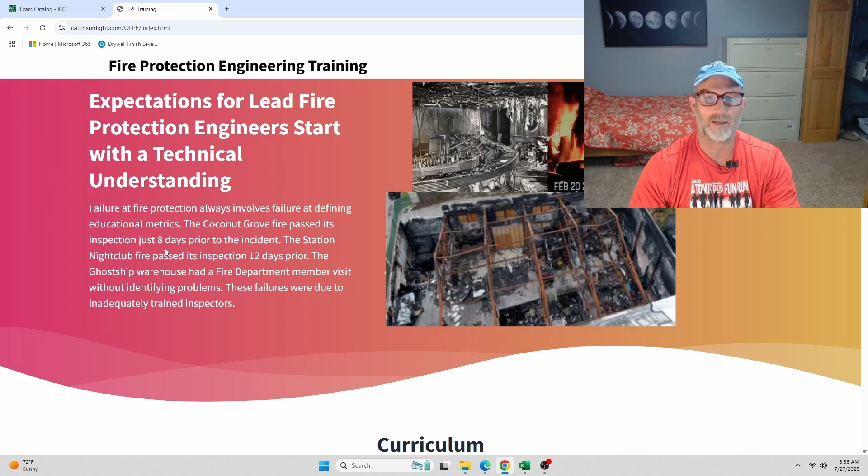So take a look at this. I've been through this a couple times. I set up this website a while ago for people in fire protection engineering related fields. When you're a professional engineer, a lot of times you take those PE exams, there's not a single code reference, but if you're typically an engineer, you need to know the codes. And failure on the part of engineers, or anybody really, to know the codes in inspector positions or design positions results in serious problems.

So I put this together a few years ago to do that. I have 500 questions for the building official test. I'm calling it building official, but it's certified building official, BC test, ICC BC. I have it right there. How this works, they're all 10 question tests, so I have 50 of them. And at the top, you'll see it's certified building official, code quiz 1, 2025, ICC IPC.

And how this works is all you have to do is hover over what says hint, it'll give you the reference. So it's different than the ones I've done more recently. I've cut some corners on the ones I've done more recently, I didn't want to take the time to put it together. This one, I took quite a bit of time to do.

So let's just look at question 1. This is from the IPC, you're going to see the same thing in the IBC, it has the same plumbing table there. How many water closets are required for a church with 150 men and 150 women? I think, man, I don't know, 3 for men, 3 for women? What would it be? Sometimes it's different for men and women. I'd say B. I come down here, hit submit.

And what did I get here? Does it give me the number? Yeah, see, it's 1 out of 10. That's how it's set up here. Your score is 1 out of 10.

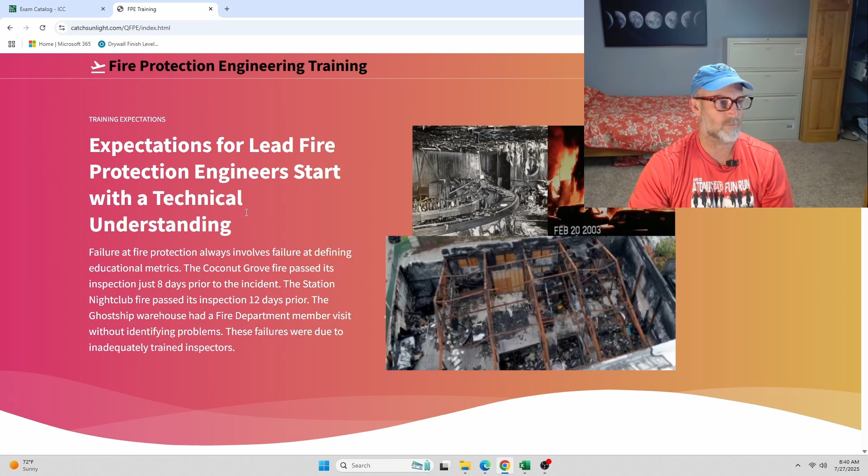Okay, let's just go back to the previous page. You can grab one anywhere, let's just grab one here. So see how it says IBC now? It said IPC before, this is IBC. You can, it's just going to go through.

This one says IRC. So at the top, it's going to tell you what the code book is, and the hint is going to give you the specific. So go to section G2406.2 of the IRC 2015 edition.

Here's the problem. Between the 2015 and 2021 or 2024, some of the reference numbers have changed. The substance hasn't changed, but the reference numbers have. So you could actually go to ICC Safe and look at the 2015 version to look up the code, or you can just find it in the 2021 or 2024 editions. I'm not going to take the time to map 2015 to 2024, it would just take too long. So that's how this works.

The objective here is, as with my other quizzes that I've developed, I want you to see this. You need to go through this with a specific periodicity. And I write it out here. You need to actually highlight.

So this is the 2015 IMC. I'll go through the 2015 IMC with you just as an example. I'm not going to go through all these code books, it'll just take too long. And I've been through some of these code books in past videos. Just look at some of my other videos for highlights.

It'll satisfy that need. But you can see how I highlighted here and underlined a certain section. And that corresponds, the underline corresponds with the answer. The highlight just generally corresponds with the reference.

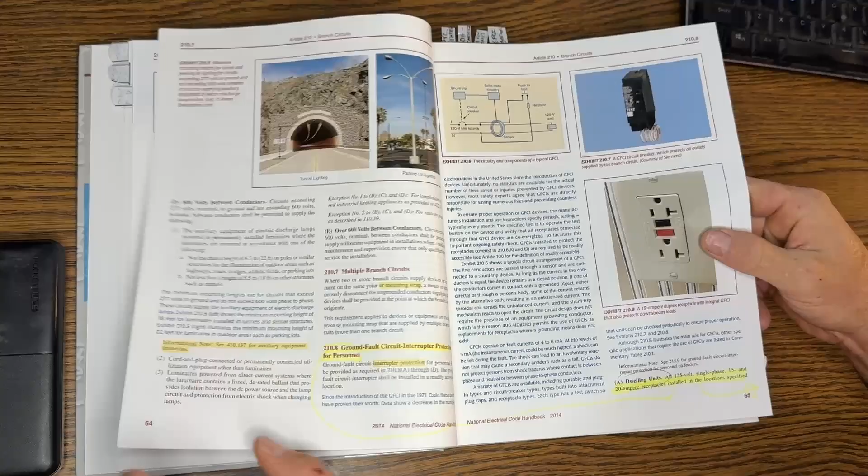GFCIs - dwelling units, bathrooms, garages. That's what they're asking. Just look at my highlights - where do you need GFCI protection? Bathrooms, garages, and then I came over here - kitchens, there they are. So there's your 3 there for GFCIs.

Countertops, wall countertop spaces - you have to be able to access within 24 inches. So the question was, anytime you're dealing with a kitchen, you got to access a receptacle within 24 inches on any countertop more than 12 inches wide. Islands - 24 inches and 12 inches there again, same thing. Just read that, take a look at it. I'm not going to take the time to read everything here.

Lighting outlets required - let's see. Vehicle door in garage shall not be considered as an outdoor entrance, blah blah blah blah. Just read the highlights - highlight what I did in yellow. Keep in mind, that is not yellow - I'm looking at the ones that I highlighted.

Okay, let's see here, over here - lighting load, 3 watts per square foot. That's what it comes down to - square meter. So what they ask is, when you're sizing lighting, it's 3 watts per square foot for dwelling units. This is just a table for sizing. I can't remember the nature of the question, but the questions I showed you before in that online test come right from these references that I've highlighted.

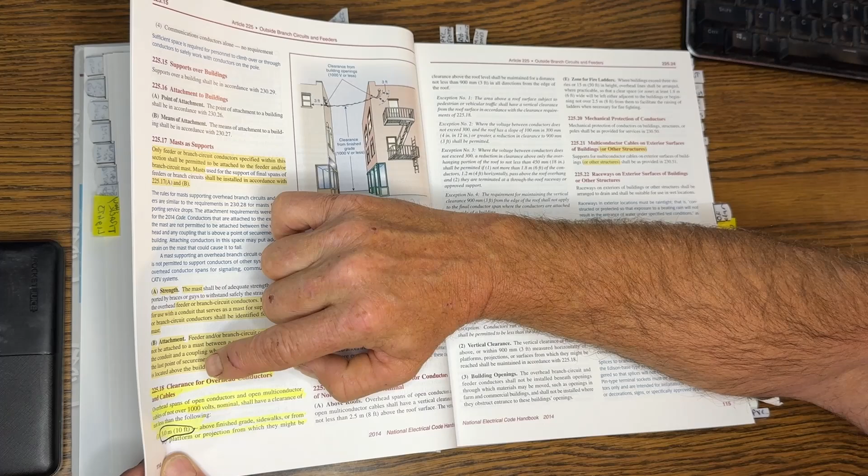Over here, clearance of overhead conductors, 10 feet above. And this is different - I'd have to go back and look at what 225 is, because it's actually higher over certain areas. I think this is private walkways and things like that. But regardless, just look where it is - it's 10 feet above finished grade sidewalks or from any platform or projection, blah blah blah blah. Remember, 10 feet, 10 feet, and 12 feet. There's some other ones, but just highlight that and read that.

I don't have time to read that. Okay, what do you got here? Capacity requirement - where the capacity requirements are in excess of 2 kilowatts, 2,000 amps. Just read it, I don't know what it is, can't remember.

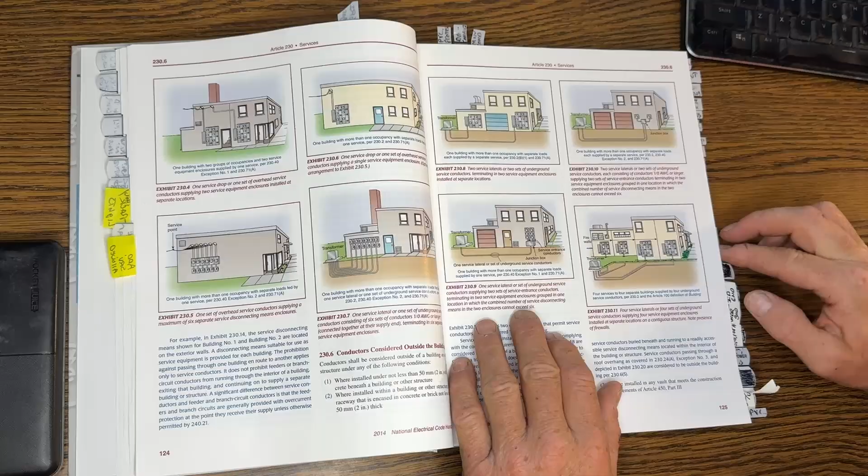Oh hold on a sec, I got a couple here. See, I tabbed this with all of the references just to make life easy so I can remember where to go, because these are the things I remember so I can flip them open and go to it. Usually if I go through these online quizzes a little bit, I can remember and be able to better do my job by knowing right where something is. I took a lot of time to study this, so even though it's 8 years old, it's embedded somewhere in my mind.

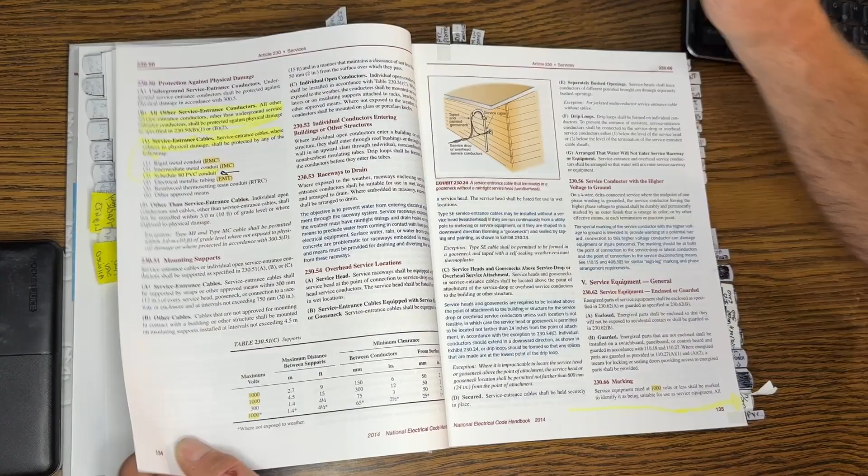Protection against physical damage - Schedule 80 PVC was the answer. Service entrance cables - I can't remember the exact answer, but I think you had to have a minimum of Schedule 80 PVC where it popped up to protect it from physical damage, I don't remember details. And let's see, I came over here - service equipment disconnecting means should be provided to disconnect all conductors in a building, blah blah blah. Yeah, pretty obvious.

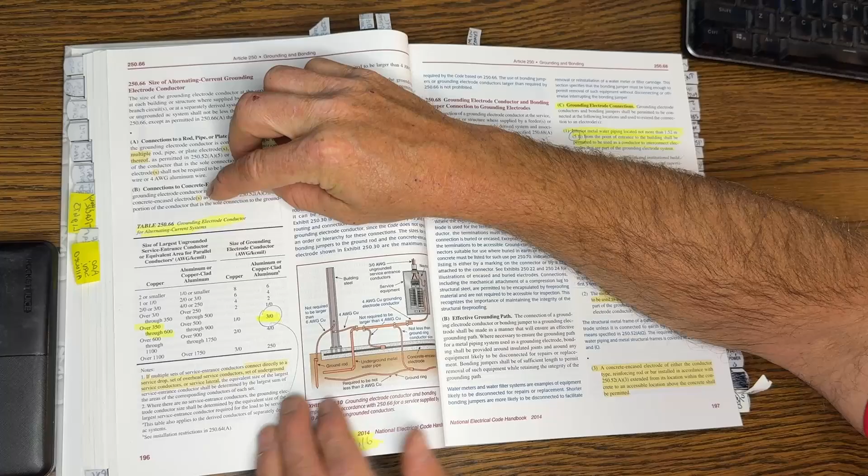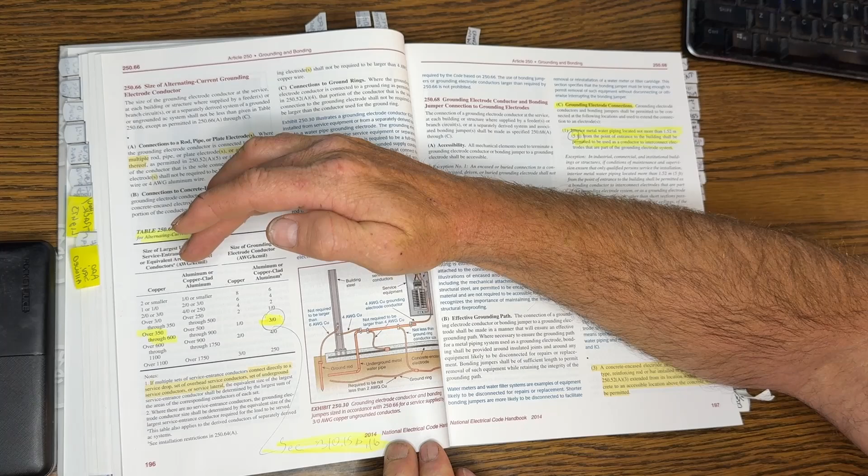Okay, let's see here. This one here, grounding electrode conductor - what did I use? 3-aught. So just know this. It's kind of hard to explain when you're sizing, but your grounding electrode conductor can be smaller than your copper conductor, but just know how to size it. I have a reference here, 310.15 B.16, I think. Just look at that.

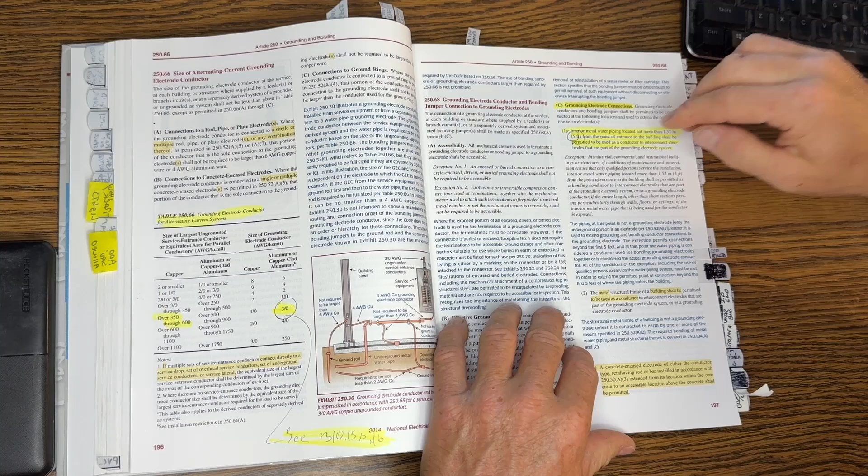Grounding electrode connections, let's see here. Identification of equipment grounding conductors - it gives you green, bare, or one or more yellow stripes for your grounding conductors. Not grounded conductor, keep in mind. There's some nuances here, just keep in mind when you're reading through this. Grounding conductor, grounded conductor, grounding electrode conductors, grounding electrodes - there's definitions there that you probably should look up. Otherwise, there's some nuances that'll throw you.

Okay, next was over here, protection against physical damage. Just read that. The answer was 1 1/4 inch, but I don't remember what it was exactly - edge of the hole not less than 1 1/4 inch from the nearest edge of the wood member. Oh yeah, so you need plates. Pretty common in industry, not a big deal.

Okay, let's see, emerging from grade, 8 foot above finished grade. Well, just read it, it's protection of your conductor. Let's see here.

83%, what was that? Just read it. Read this paragraph here, I'm not going to take time to read it. Tables are always handy in terms of knowing what, like THHN or whatever, can do. 310.104 was the reference for this stuff if you need some other information. I'm not going to show how to read that table, I don't have time right now.

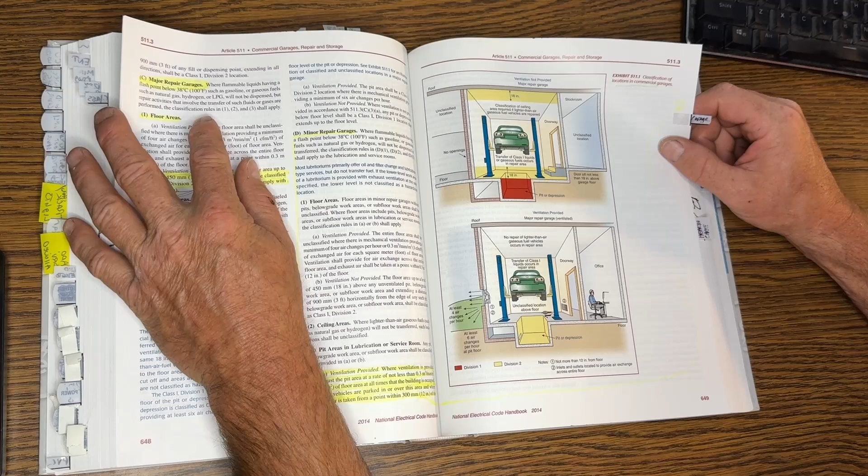All right, let's go on to this one. What do you have? Major repair garages, flashpoints, 100 degrees - flammable liquids are always defined as 100 degrees Fahrenheit under that. Class 1 Div 2, I just mentioned that - that's the type of environment you'd have to be in for a garage. If you're within 18 inches of the floor - what was the other thing? Yeah, 18 inches of the floor, but they have some other parameters in terms of proximity to where dispensing is, stuff like that. All right, let's see, ventilation.

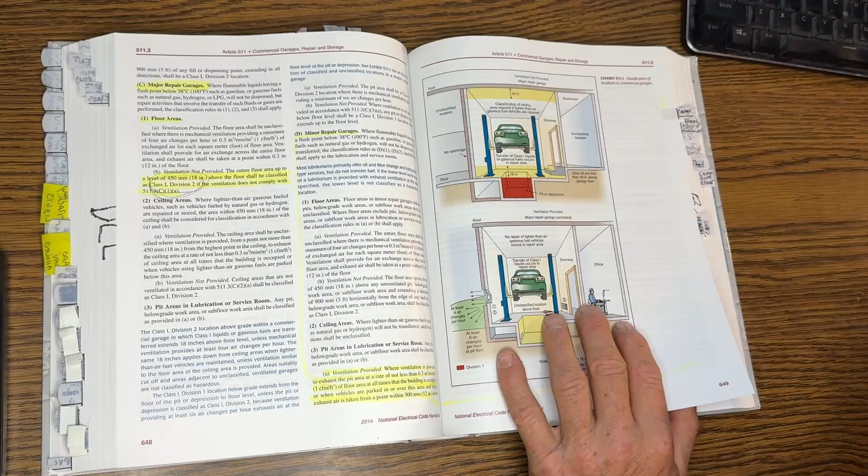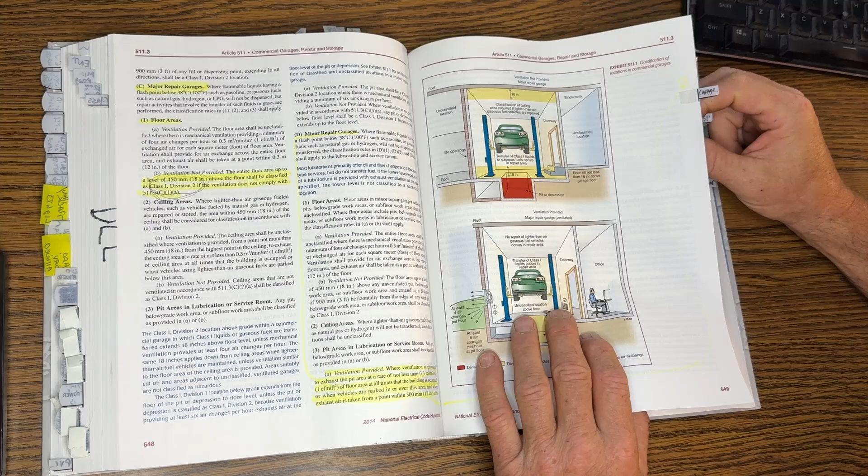Just read through the section - these are the highlights I needed to pass, okay? So just highlight what I highlighted, read that, know that, this whole class 1 div 1, know where the classification stuff is back, this section here, which is way back, but also know, as far as repair garages - get a lot of questions on repair garages. Like chapter 23 of the IFC would correspond with section 511.

All right, dispensers, dispensing - what do you need? So there's your division group number here for class 1 locations, 18 inches, again, within 20 feet horizontally in all directions from dispensing enclosures. And I find this helpful - this little map, some of these maps are pretty dang cool. I like that, know that map. I didn't highlight it necessarily, but it tells you what the offsets are and stuff like that for tanks.

Okay, let's see, next one over here - grounding receptacles, ground fault current. I don't know, I can't remember the question. Just read through that, it's not on the top of my head, it's been too long.

Exit signs and directional signs - see, I lined it over here, just bear with me, I went way over. Okay, so sources of power - 2 independent sources of power for exit signs. Shall have a minimum of 2 independent sources of power, normal source generally supplying the electrical circuit, and an alternate source when.

So basically, anytime you have - go back to the IBC chapter 10 - anytime you have a room that requires 2 exits, you need exit signage and emergency lighting. This explains what the lighting power is based on, standard power and alternate emergency power. Emergency has to come on in 10 seconds. So those are the basics - I'm just giving you the answers that they're going to ask questions for.

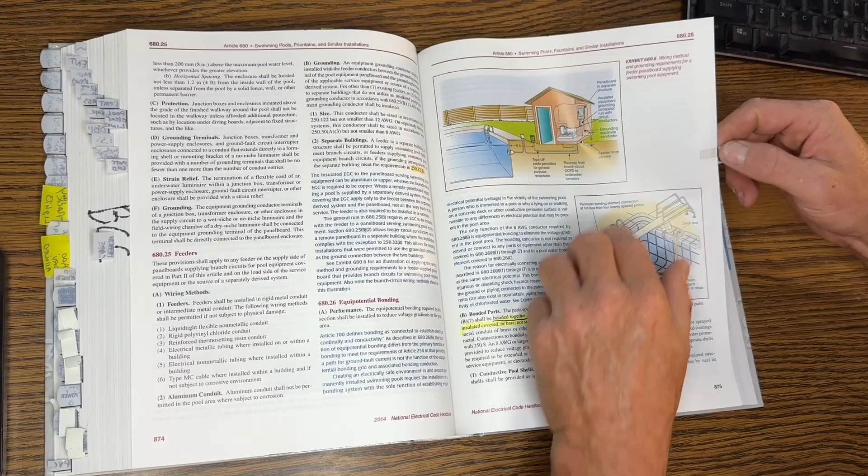Yeah, a lot of questions will come up on pools. This is a safety issue you're going to look at all the time. Fixed metal parts, 5 feet's a magic number to know if you need to be bonded - so like equipment, railing, things like that. If you're within 5 feet, you have to be bonded. All fixed metal parts shall be bonded, including metal sheath cables, etc. If it's 5 feet or more away, you're fine, so just keep that in mind.

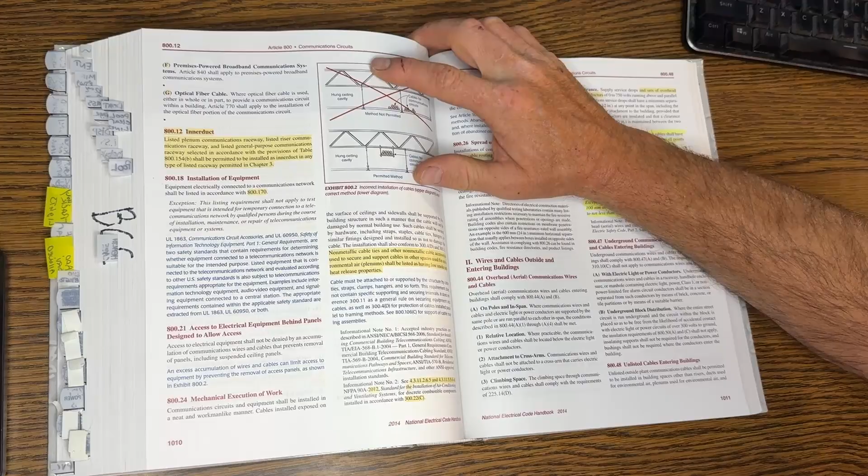Okay, next, this is the last one. What do we have? 8 feet. Communication wires are 8 feet, so they have to be above 8 feet. Okay, that's NEC. Alright, just went through all the NEC stuff associated with the building codes and standards.

Let's just jump through the IECC really quick as well. Don't want to bore you too much, but want to get a few of these standards so you can get a vibe for what's going on. COP, you need to know COP, coefficient of performance, infiltration regarding leaking air, things like that when you do a blower test, R value, U factor for like your windows. They actually rate walls with U factors in IECC as well. Just keep that in mind, it's not just windows.

Okay, a minimum of 6 inches below grade for your insulation or your protection of exposed foundation insulation. So yeah, 6 inches of protection below grade is what you need. If you're putting blue boards on the side of a wall or something, you need to protect that.

Wood frame and other, so R20. Keep in mind CI is continuous, so you're allowed to do a cavity of R13 in, whatever this is, climate zone 1, wood frame and other wood, or you can do 3.8 continuous and R20. Excuse me, R13 plus R3.8 continuous, or do R20. That's what the answer was - I think it was, what was the cavity insulation? That's how they would have stated it. In a climate zone 1, wood frame construction, R20.

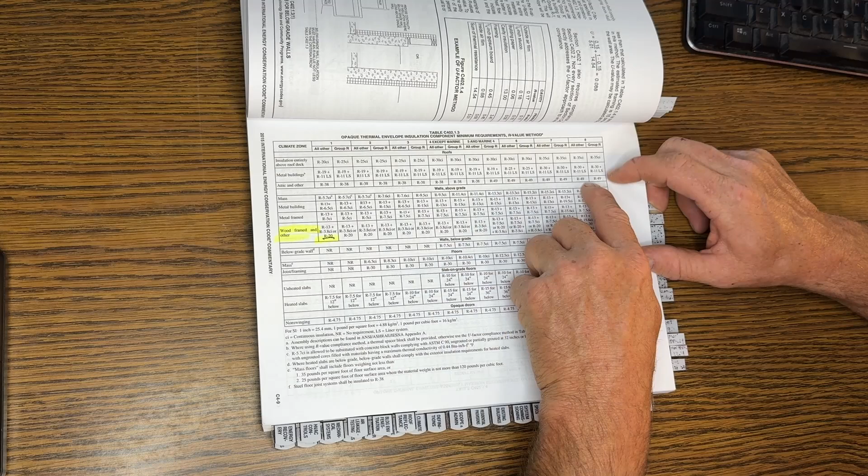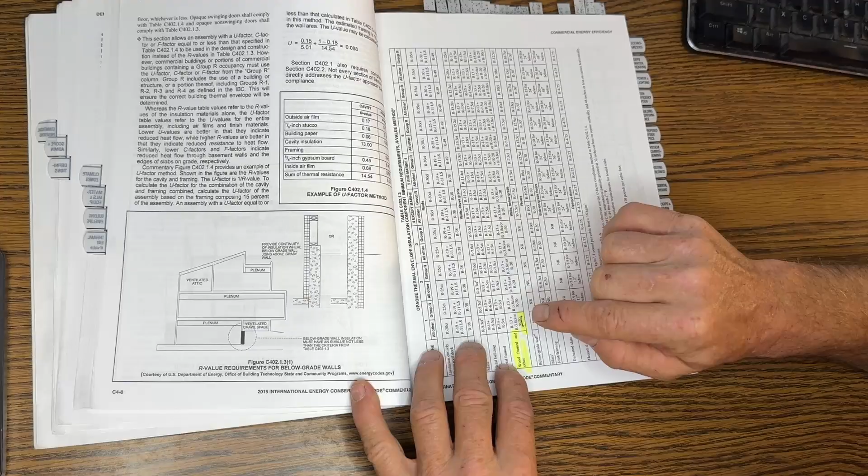Keep in mind too, these numbers might be - this is an area where there might be some difference. We're going to be ever tighter in terms of insulation. I'd have to stare at this for a while, but I think these numbers may have changed. I'm pretty sure they've changed actually. They're actually like your R60 and stuff now. So yeah, look at the current versions rather than the 2015 version. My test questions may be a little different, so you want to correlate that with the 2021 or 2024 version now, because I think this table changed a little bit in terms of minimum insulation requirements.

Okay, vertical fenestration requirements. Let's see here, air leakage for testing. Let's see, thermostatic setback capabilities for your control system for HVAC - 55 to 85 degrees. I don't think those have changed. Those are kind of magic numbers for heating and cooling, where you need to set back stuff.

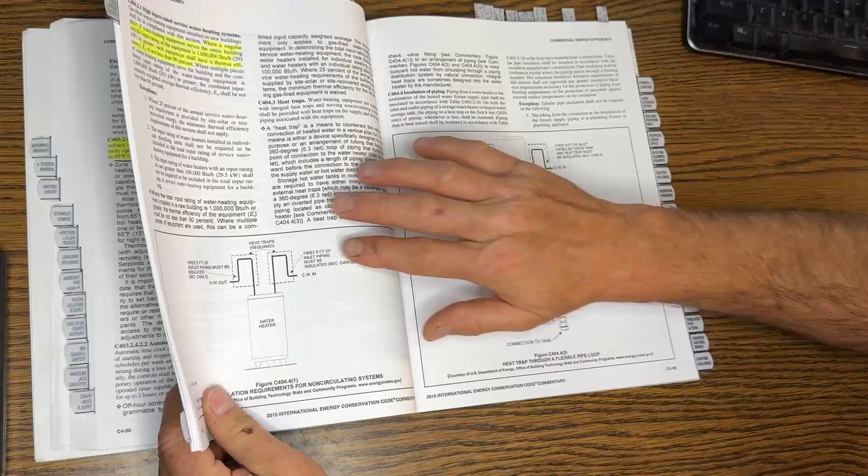High input rated service water heating - yeah, just read your efficiencies there. This is, the IECC might be one book that may have changed. But look, I'll tell you what, I already did the test for the IECC Residential Energy Inspector, so you can look through that. I didn't do the commercial one on that, but it correlates very well. And IECC is fairly easy, but just basically find these questions, how they correlate to like the 2021 or 2024, and I think you'll be fine.

Interior lighting power, building area method, 0.66 watt per square foot, for sizing. Final commissioning report documentation: 90 days, certificate of occupancy. Okay, so just take a look at this stuff.

Okay, additions - when to execute, requirements associated with additions, renovations, alterations, etc. Alright, so these are some listings that I had to know. That's why I tabbed this. So just take a look at that.

Let's see, in the appendix, residential stuff - let's see, insulation requirements. Insulation and fenestration by component, marine. Yeah, I mean, the same tables are here. I can't remember if the numbers are the same between 2024 and this or not. You might want to look at that. I did highlight this in my other video on residential energy inspector though, so you can see that.

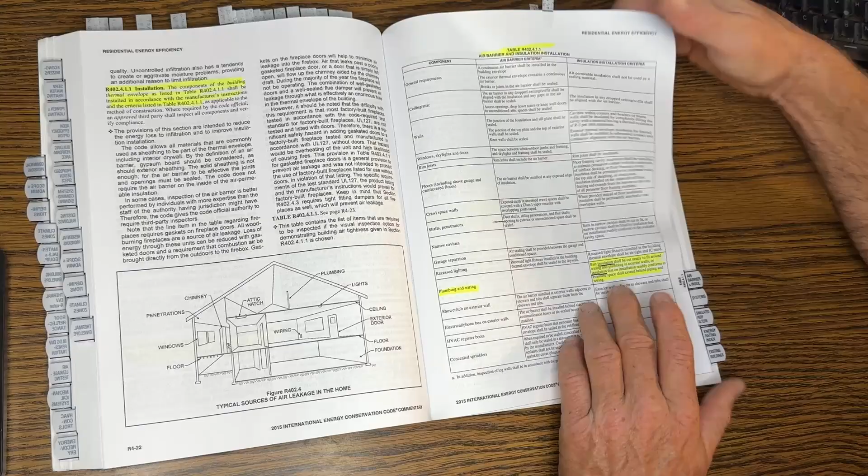So maybe I'm not being as helpful as I hoped on this, just because of some subtle changes. A lot, like this table is going to be the same, 402.4.1.1. I think it's a different number now, but the reality is it's going to tell you what for your thermal envelope. For the most part, it's going to be pretty good. Okay, so that's it for the IECC.

Okay, let's just take a real quick look at the IMC. I want to show you the kind of questions that I was asked on this.

Okay, so let's not belabor this too much. I want to go through the IMC really quick. Rough-in inspection, required inspection and testing, just asks for what the rough-in requirements are. Let's see here.

Condenser, know the definition of condenser. You'll need to know that. You'll need to put some thought into this. I can't remember, it was some funky question that kind of came up when I did the M2 test. Anyway, a condenser is important to know. Evaporator versus condenser, there's some subtle question though.

Anyway, I asked some good questions on here. My questions stand, guys. When you go through that online quiz, test that I generated, just look at it. I think the questions are still pretty good.

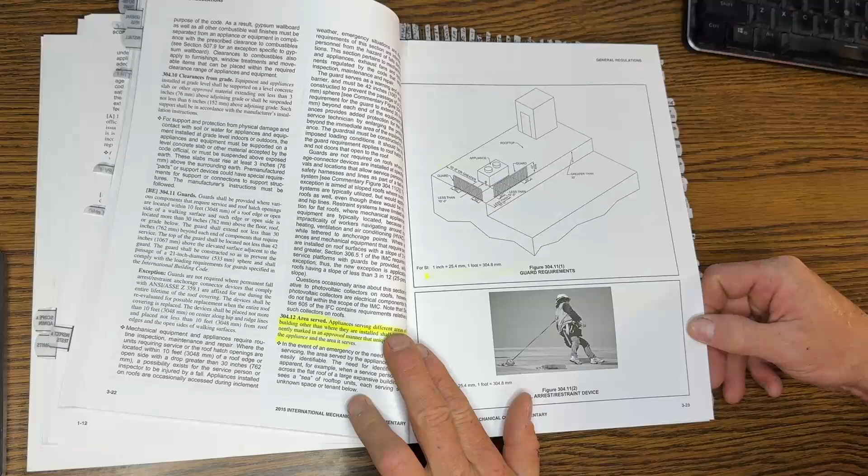Okay, type 1. So the different kinds of hoods you need for commercial versus non-commercial. So just know that. Let's see here. Area served, appliances. Okay, just read it, highlight it.

Piping support bracing, they're always going to ask you questions on the piping support. Just kind of know that table for sure.

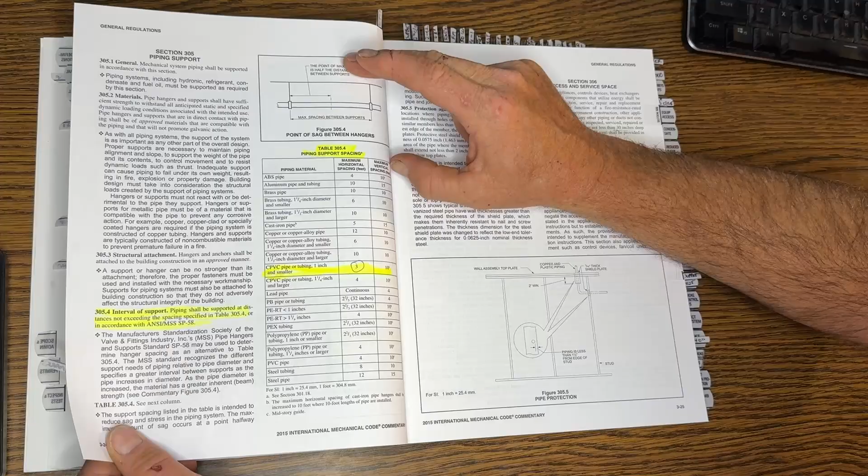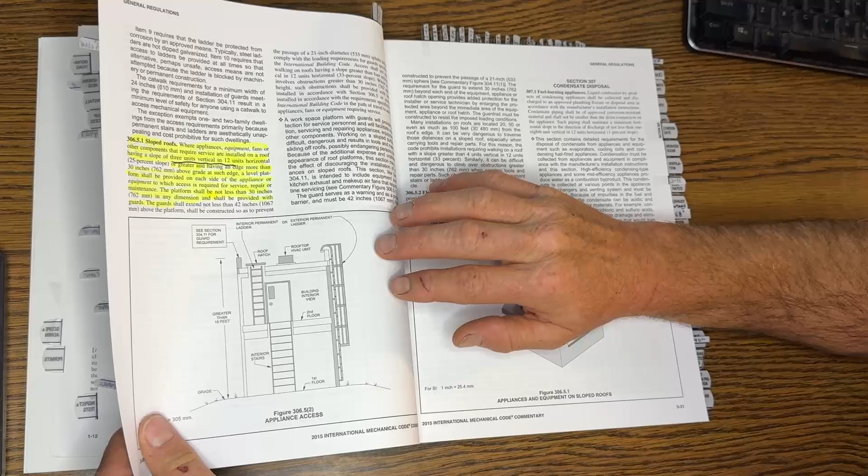Central furnaces, 3 inches along the sides, back and top. So I think the question was, how much clearance do you need? Minimum working space clearance, 3 inches was the answer. Along the sides, back, and top. And 12 inches wider than the furnace. Okay, so just know that, read that. I have a question on that. It'll help you embed that in your mind. 3 units and 12, you need basically a platform.

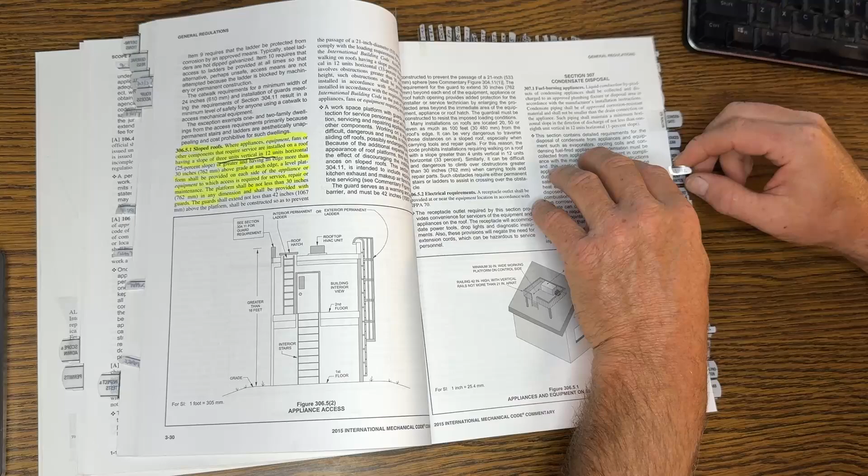Okay, just read that. Okay, let's keep on trucking here.

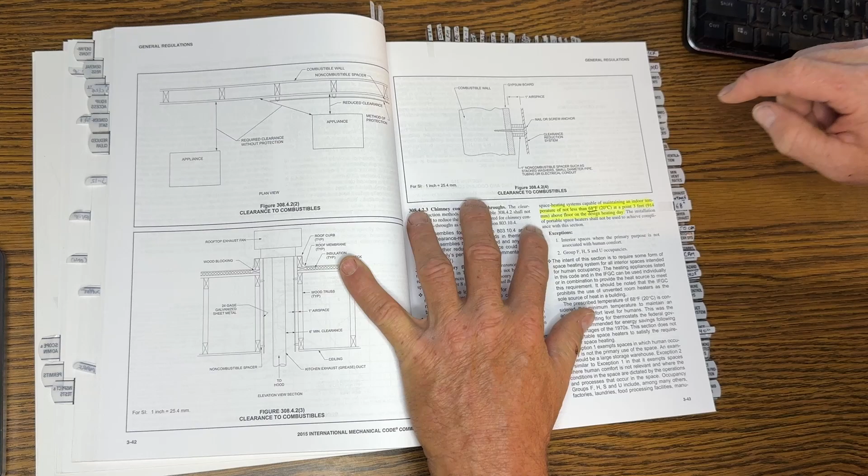68 degrees. Okay, this comes up a lot. 68 degrees, 3 feet above the floor. You have to be able to maintain it with your HVAC system. That's basically what your design parameter is for HVAC.

Intake opening, let's see, 3 feet below contaminant sources, 10 feet of the opening. Okay, so just look at that. I cross-referenced 918.5 as well. You want to look at that.

Minimum ventilation rates. Yeah, so keep in mind there's a formula attached to this as well. Look at the formula over here. Just keep in mind they might ask you minimum, but then it's based on R sub A and R sub P. So just look at that and go through the commentary in terms of explaining how to use it.

For me, in the actual question, this was the answer. So they were looking for R sub P, CFM per person rate. When you're actually doing the design, you need to actually do the formula, but the question didn't ask for that.

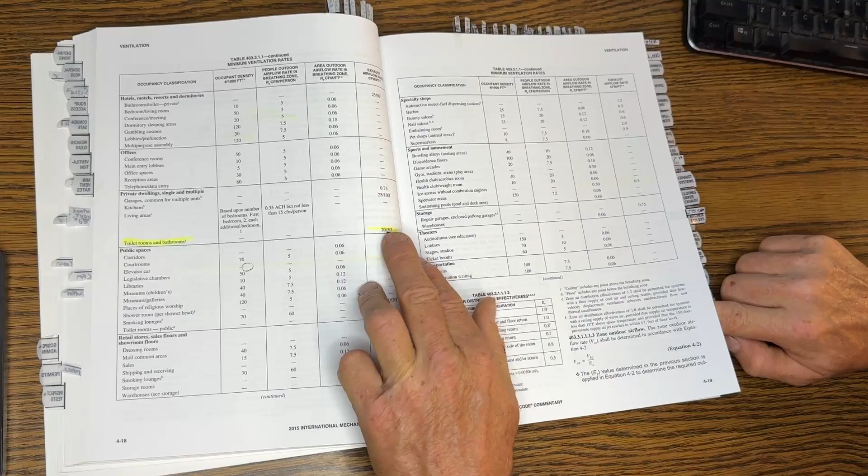Intermittent. What this is, so 20 and 50 for private toilets, 20 continuous, 50 intermittent, if you're flipping a switch on or something. They'll probably ask you that no matter what. I just about guarantee they'll ask you the 20-50 rule for private bathrooms.

Okay, let's see where we're at here. Okay, what did I find here? Rates are per room unless otherwise indicated. Minimum ventilation rates. I can't remember why I highlighted that.

Go through the questions, I think I tabulated the questions that I saw. I did that shortly after taking the test. I created that test, the online test that I showed you earlier. I did that shortly after taking the actual ICC test, so it was pretty accurate. 8 years ago, I can't remember too well now.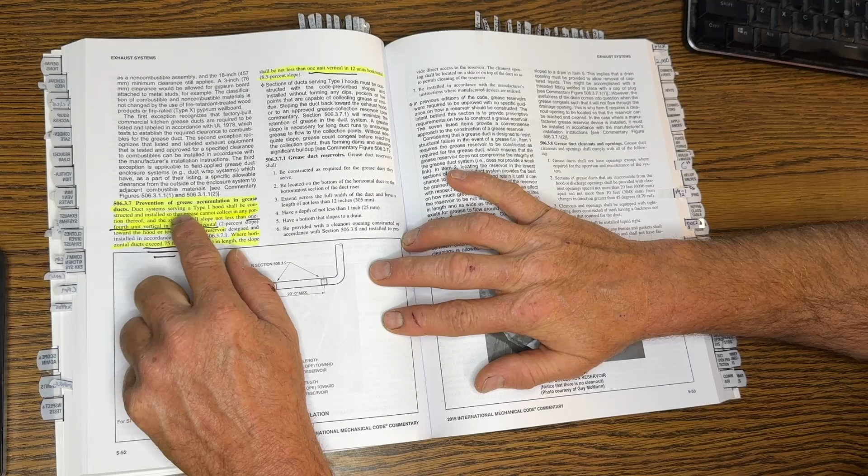All right, prevention of grease accumulation, type 1 hood. Let's see, 1 unit vertical in 12 units horizontal. Yeah, to drain your grease. Makes sense. Okay.

Exhaust outlet serving type 1 hoods, not less than 40 inches above the roof surface. A termination for your vent outside.

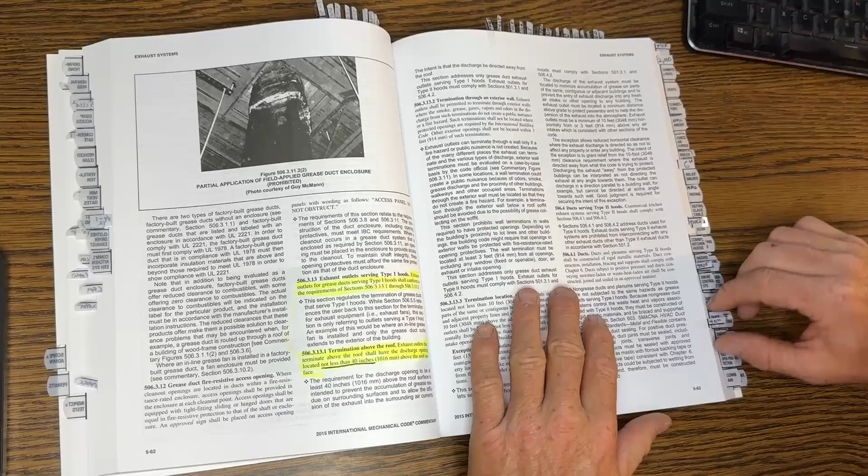Permit holder shall furnish the necessary test equipment and device required to perform the test. You got to know that. That's come up in multiple tests too, as a matter of fact.

All right, materials within plenums. 1 and 2, yeah, so exemptions for 1 and 2 family units. I can't remember the nature of the question. Just highlight and read that.

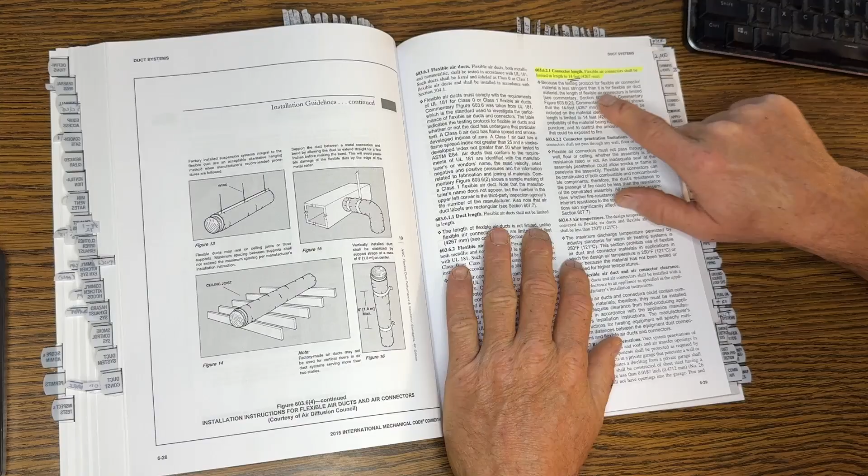Connector length. Okay, so you have your ducts and your connectors. If you're doing a laundry, a bunch of laundry dryers or something, your connectors are limited to 14 feet. So just keep that in mind.

Coverings and linings, flame spread not more than 25. So check out Chapter 8 of the IBC for the definition of that, but it definitely makes sense. That's what you want.

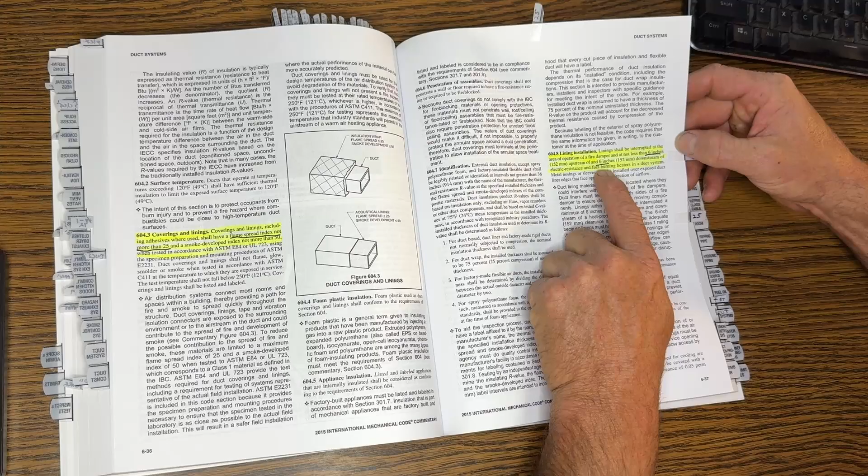Okay, lining shall be interrupted. Yeah, just take a look. I want to get through this. Just read that. Let's see, what did I do here? There's that one, that one.

Okay, return air riser. I have a bunch of arrows, I'm just following these out so you can see it, because they all go to all these items answering the same question. I don't remember what it was exactly, but oh, this is important - 15,000 CFM. It's kind of the magic number. It's not an NFPA 72 thing - it'll throw you. It has to do with smoke controls, such as smoke detectors. Yeah, this will throw you. I'm telling you this because of the Fire Plans Examiner exam.

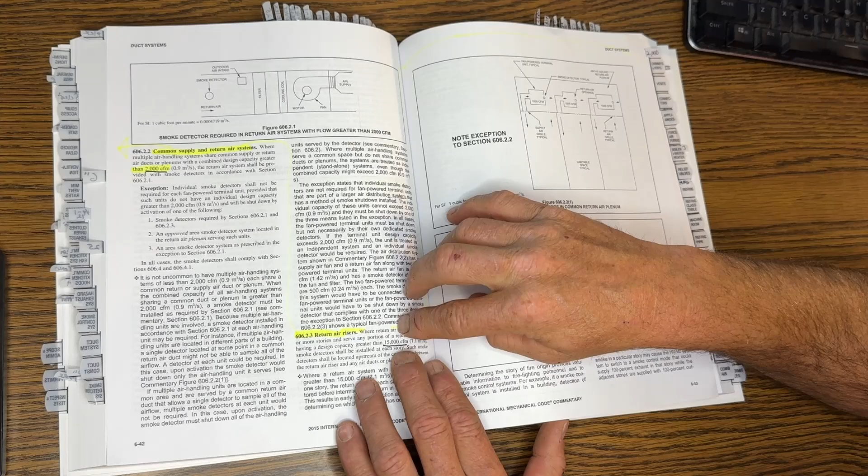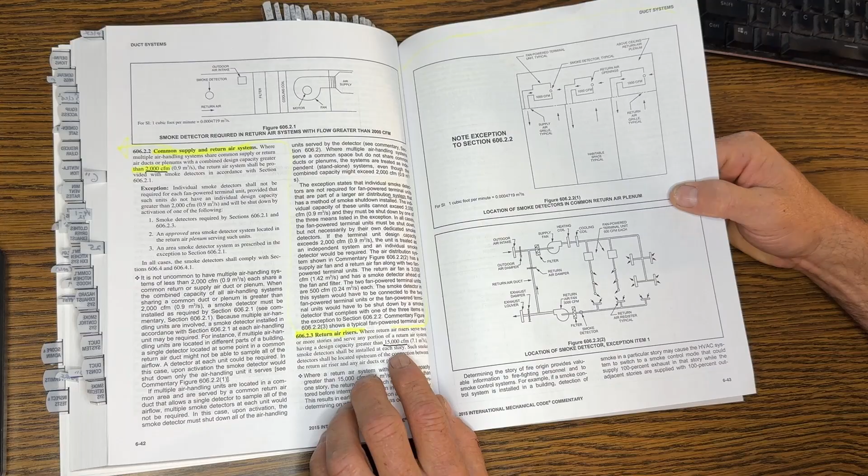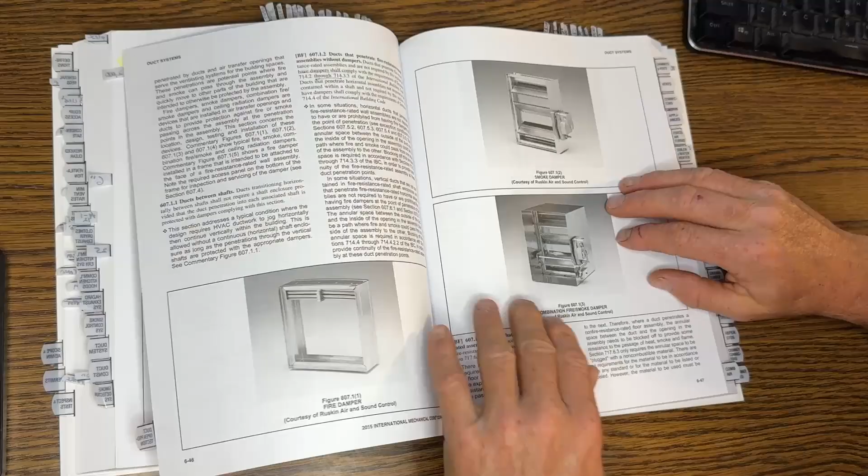Normally it's 2,000 CFM. It does not include this 15,000 within NFPA 72. This is only in the IMC. It's one of those gotchas, and it's kind of annoying - you just got to know that. So just when you read that, if you're ever going to take the Fire Plans Examiner, realize there's one little requirement for smokes within the IMC at 15,000 CFM for return air, that requires additional action that the NFPA 72 does not. NFPA 72 is the standard for fire alarm systems.

All right, boilers. Let's see - UL 834, you have to know what the listing is. Oh yeah, and conform to manufacturer's instructions. This comes up all the time - how do you install something? Is it by the IBC, IMC, or manufacturer's instructions? Default to the manufacturer's instructions.

Top clearance from boilers - information for boilers, minimum clearance from top of boilers.

Let's see here, discharge location - I'm guessing it's condensate. I'm not sure, what is this? Air, there it is. Air, Chapter 5: exhaust for mechanical ventilation shall be discharged not less than 20 feet from a property line. And there's some variations - this is going to throw you. There's definitely variations in this depending on what your exhaust type is, so keep that in mind. It does get a little confusing.

All right, we're getting there. Let's see here - hydronic piping. Hydronic piping gives you the standard you need to judge hydronic piping for steel pipe: ASTM A53. That was actually a question on the IMC exam, the M2 exam, as well as BC. Preparation of pipe ends: cut, square, reamed, and chamfered. The answer was reamed and chamfered, as I recall.

Okay, all right, where are we at? Pressurization during installation, embedded joints, embedded piping - let me just think. Piping to be embedded in concrete shall be pressure tested prior to pouring concrete. During pouring, the pipe shall be maintained at the proposed operating pressure. Embedded joints: steel pipes shall be welded. Okay, the answer was welded there - had a couple questions from this page.

Almost through, guys, let's do this. Let's see, one question left. Protection of equipment: solar equipment exposed to vehicle traffic shall be installed not less than 6 feet above the finished floor. All right, that's it.